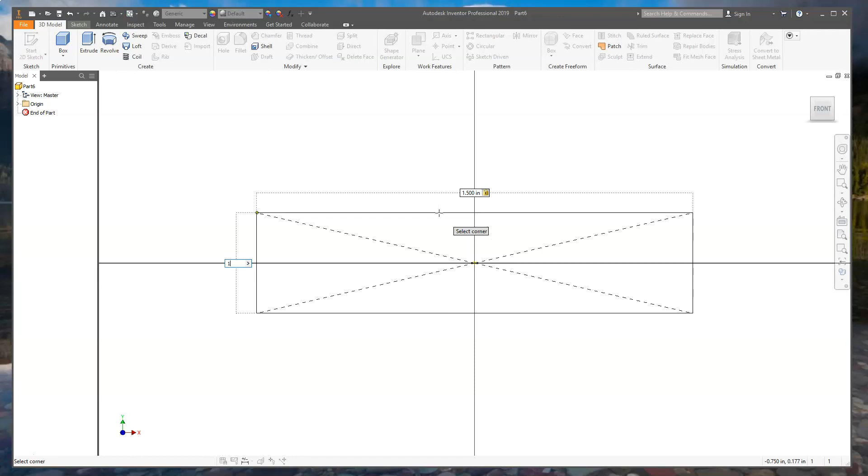So the first thing that I want to do is just get my basic cube out here, my block. It's 1.5 inches by 1.5 inches by 4 inches. So into Inventor, click on New, double click on Part, go to a box, XY axis, 1.5, tab, 1.5, enter, 4 inches long, enter, and there's my basic box, right?

All right. Now, I'm going to put a hole on the side of this, but if you looked at that drawing closely, you'd see that that hole was actually offset a little bit. You can see it's sitting back off that surface a little bit. The holes, the porting, they're on this face over here. So it's setting back 7/8 of an inch, and the diameter of the hole going all the way through is 1/2 inch.

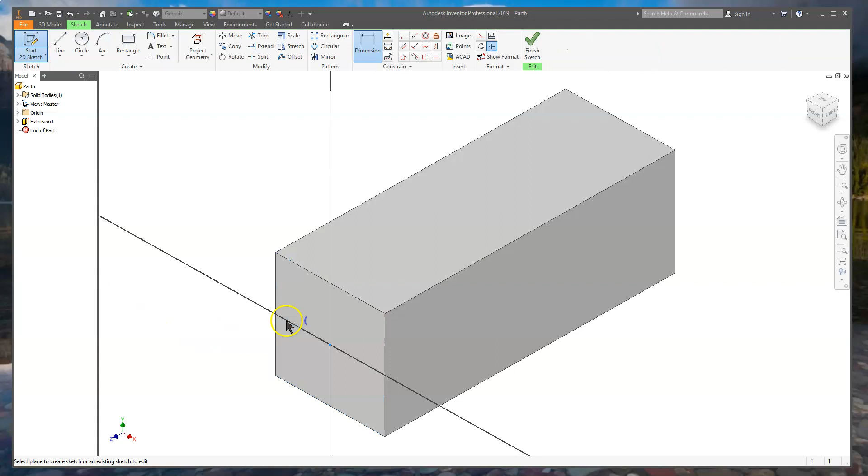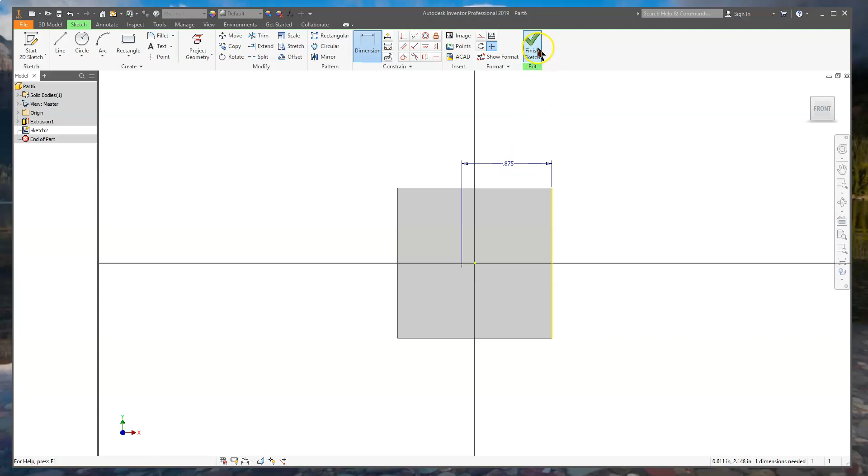So we go back over to our drawing. I tell it to sketch on this surface. I put a center point on there, right? I come off the center line here and I come back. I tell it that I want the distance from the face where I'm putting the ports to this right here was 875 thousandths, which is 7/8 of an inch. Tell it that I'm okay with that. I go up to my hole command. I tell it that I want the hole to be 1/2 inch in diameter, and I want it to go through all of it.

So you can see there, I'm going to change my view style here, view style right here. I'm going to show the hidden edges. It may not show up in the video very well, but you can faintly see it going through there. Now I'm going to do all my iFeatures all at the same time. I'm going to put all my holes in this first. I could do the iFeatures right now if I wanted, but it'll save me a little bit of jumping around.

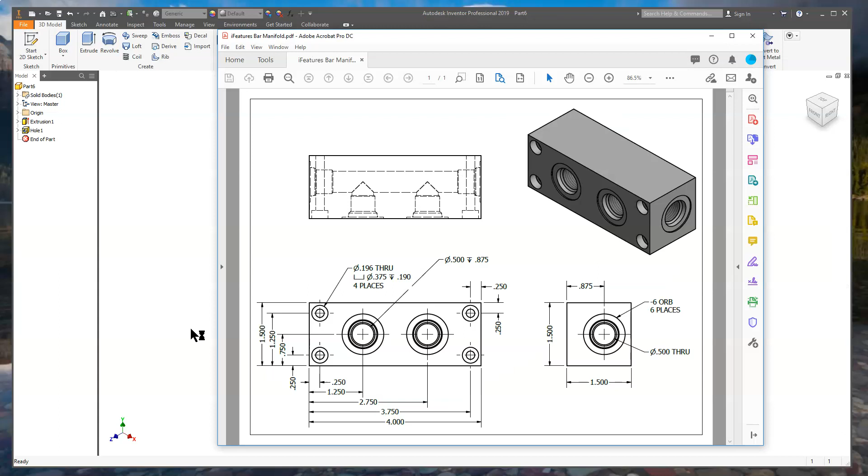The next thing that I want to do is put these holes in here, and these holes are again a 1/2 inch diameter hole, and they are 7/8 of an inch deep, 875 thousandths, and this one's located 1 1/4 inches over, and this one's located 2 3/4 inches over. So let me see what I can do there.

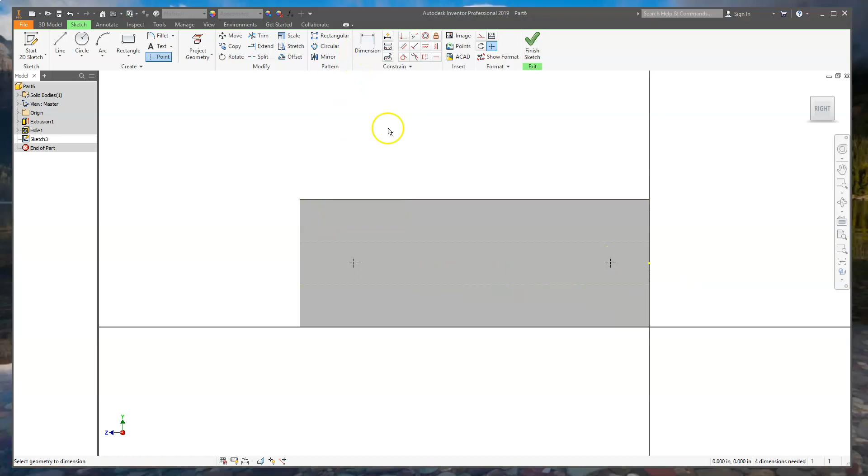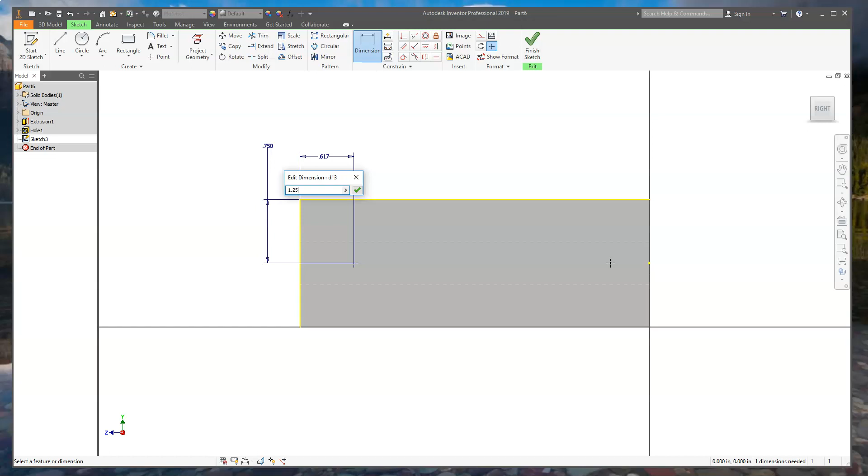Okay, I tell it that I want to do a sketch on this face. Tell it to zoom everything here, and I put a point here, and I put a point here, and I can check to see if they are centered up, right? So I can say from here to here should be a dimension of 1.5 divided by 2, and sure enough it was on there. And then I can also make sure that I am on the same level there. Put a dimension on to say come over from here 1 1/4 inch. And this one here was set to 2 3/4 inches.

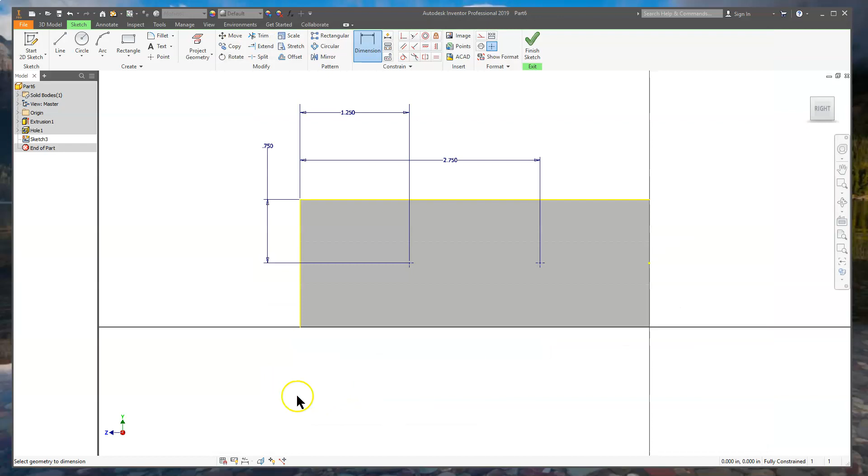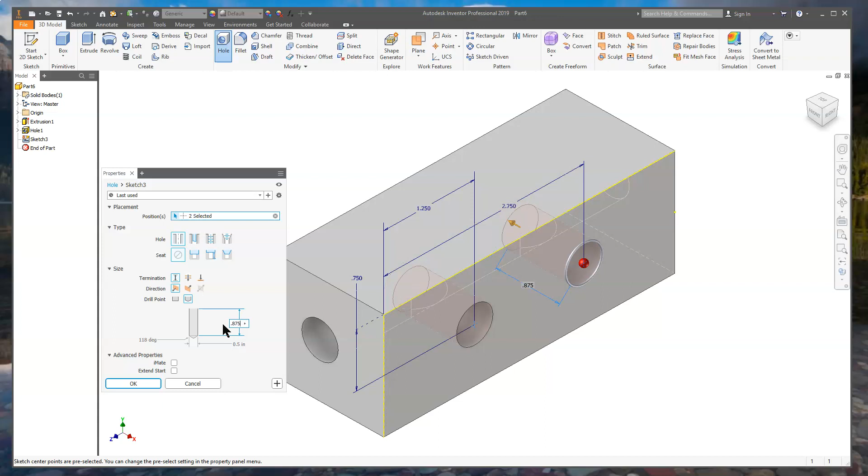So I've got my 2 holes in there, right? Let's make sure I've got those dimensions correct. One of them was at 2 3/4, the other one was at 1 1/4. So we're good. Go to the hole command, and these are set already for 1/2 inch, but we don't want to go through, right? We want a distance. That distance was not 1 inch, it was 0.875. So I click on that and say OK.

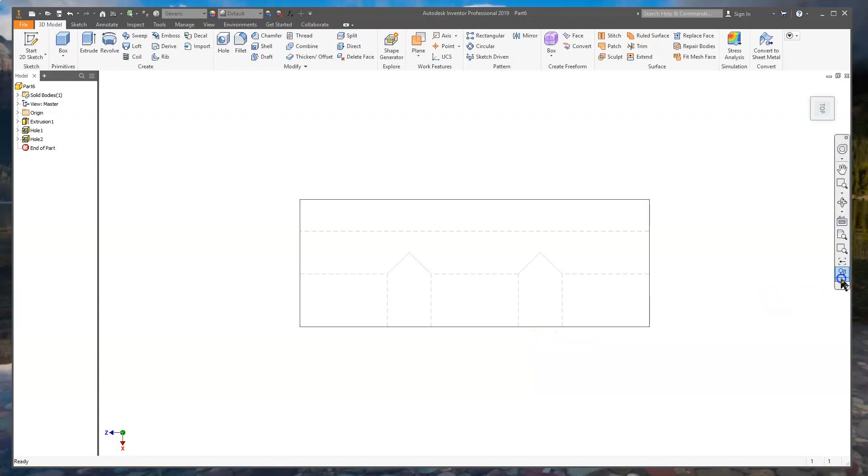If I look at the top of this, I'll change it to a wireframe view with hidden edges. You can see there it is coming together, right? Passageway, the porting on there. Go back to my home view. I need to put those ORB ports on there. These are going to be done with iFeatures. Let me show you that.

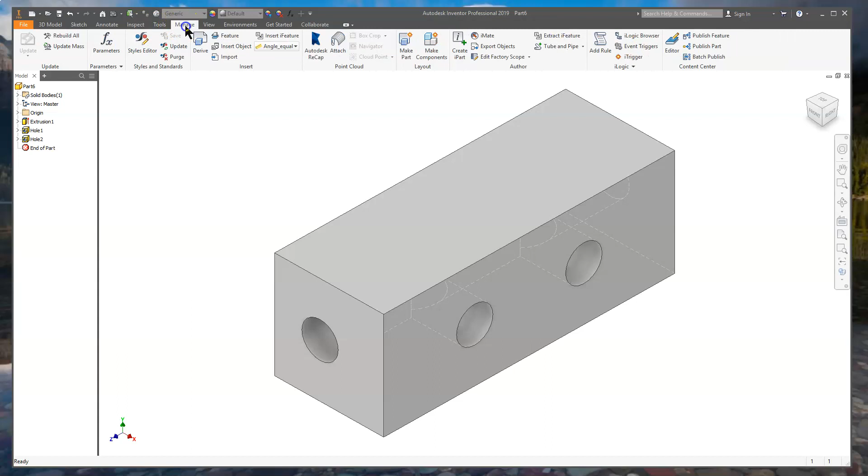Right now I'm in the 3D modeling tab. I'm going to move over to the Manage tab. And in the Manage tab, I have an icon here that says Insert an iFeature. I am in my ORB porting iFeatures, and it shows all the different ORB ports. These were made by somebody else for the Fluid Power program. They were actually using them in industry and shared them with us. So I'm going to make this a -6. I'm going to click on a standard -6 port, and click Open.

Now, it's giving me some errors. This goes back to our very first video where we talked about building projects. Everything that you've been doing has been automatically saving to that project. This is saying this is not in the location where your project is. It's not a problem. It's going to embed it in the part. So I'm just going to say yes. This is more of saying, are you really sure you want to do this? And I'm going to say yes, I'm sure.

So I come over here and it gives me this port that I can go in there and put on. I'm going to put it on this end here first. So I just click it on the surface that I want it to be on. And then I go up here to my dialog box. I'm going to click Next. I don't want to make any adjustments on the information here.

I go Next. And then I tell it I want to activate this in a sketch immediately. And if you don't do this, you're going to regret it. You want to go into the sketch first. I click on Finish, and it shows me some geometry here. These two should be lined up with each other.

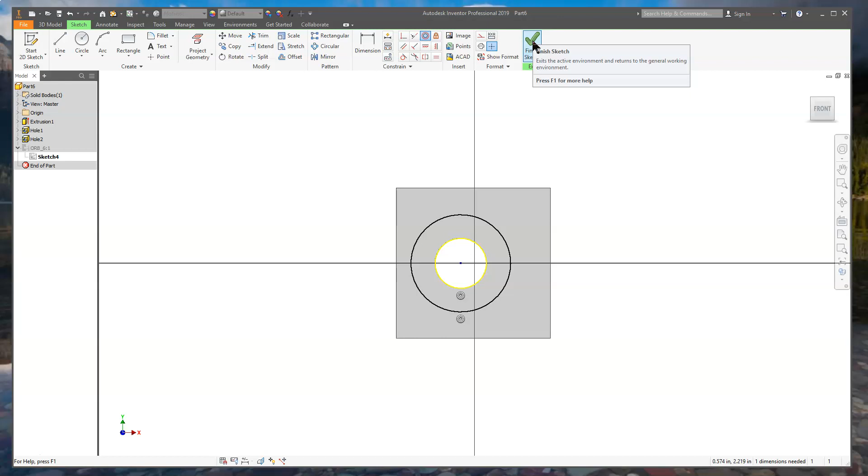I'm going to use the concentric constraint and say, take this and constrain together. And it automatically puts them together. The nice thing is if I move that original hole, it will move the ORB port with it. If I don't constrain it, they won't move together.

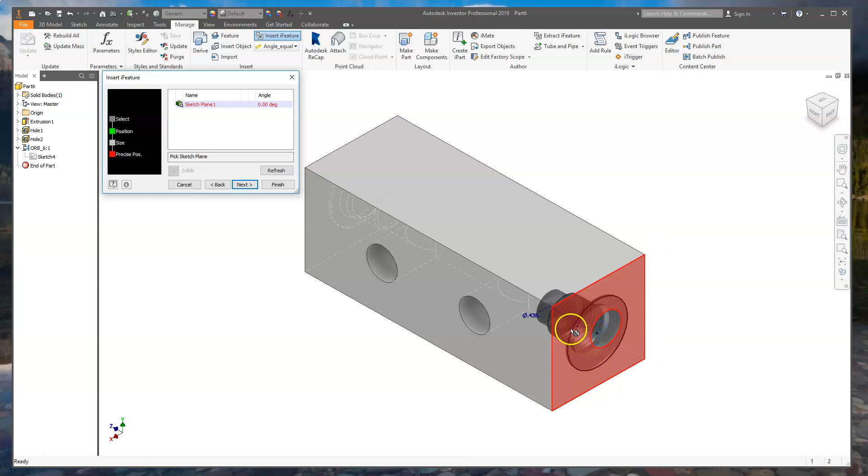All right, let's go get the one on the other end here. So where did I go? iFeatures. It's automatically going to the last iFeature I used. I go, sure, that's what I want. I know it's not in the correct directory that I'm using. It'll still work. I click on that face. I click Next, Next, activate into a sketch immediately, Finish, go up to make it concentric, tell it Finish. There we go.

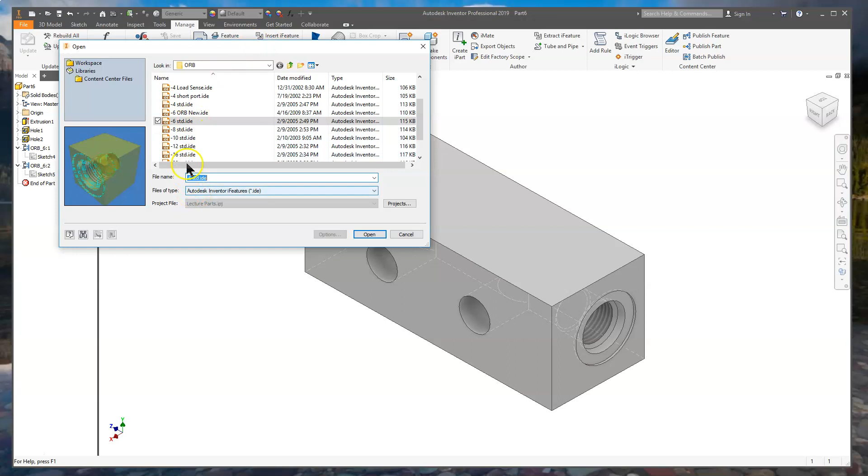I now have two more to go, right? I click on Next, and I click on that. You get it? I know that. Okay. I put it on this face. Now, this is really important.

If I had a third port and it was right in the center here, I don't want to fill that center position first. I want to fill the outside edges first, because once I put that in there, it's going to get confused, and you put the port on there and it's going to say, there's nothing there to do. The material's already gone.

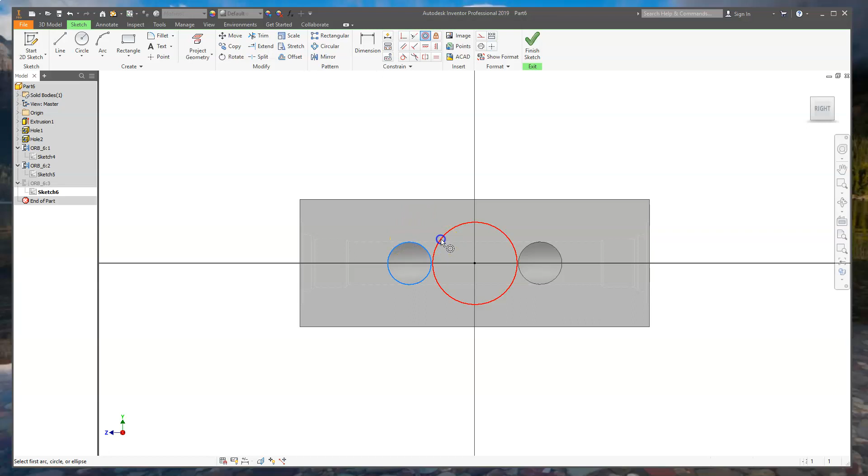So I'm going to go and say Next, Next, activate in the sketch mode, Finish. Go to constrain it here and say go here to here. Put it on there, go Finish. There we go. And then I go iFeature, and that's the one I want to use. I got it. I know it's annoying.

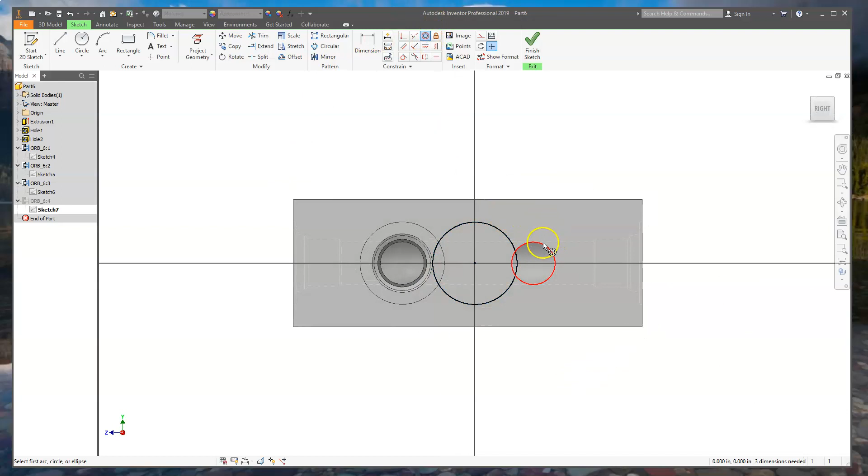We put it on here. We go Next, Next, activate in the sketch, Finish, and then we constrain it so they're concentric. There we go. Finished. Almost done, right? We've got to put those fasteners or the places through there to mount this. We should never build manifolds without having a way to mount it to a surface.

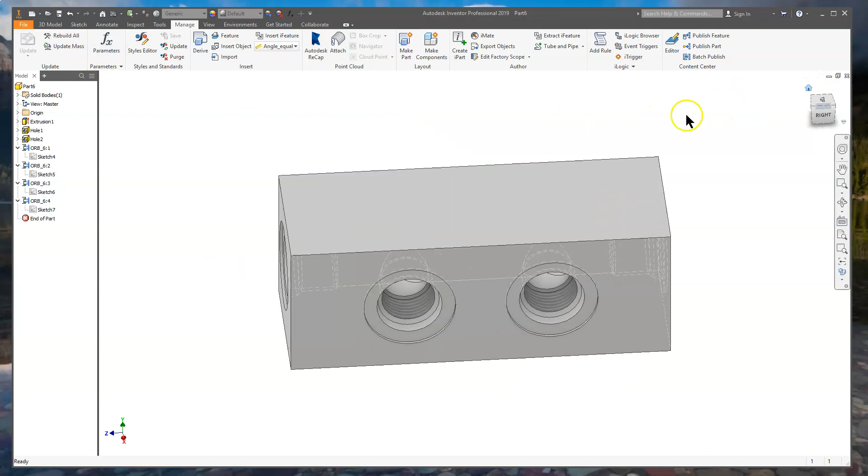So I'm going to go back over to the drawing and see what's going on there. Those are all located 1/4 of an inch off each corner. Okay, that should be pretty easy. So I come back in here. I'm going to get my part back in the home position. Go back over to my 3D model tools. Tell it to do a 2-dimensional sketch. Click on that surface. Tell it, come on, line up in here a little bit better.

And I'm going to go 1, 2, 3, 4. Use my constraint tool and say this and this should be on the same, as well as this, and this should be on the same horizontal. Then I go to vertical and say this one, and this one should be lined up, and this one

should be lined up. Put my dimensions on, showing that I'm going to be, what was that, 1/4 of an inch down, right? 0.25, and 1/4 of an inch over from this surface, 0.25, and it's automatically starting to position things here.

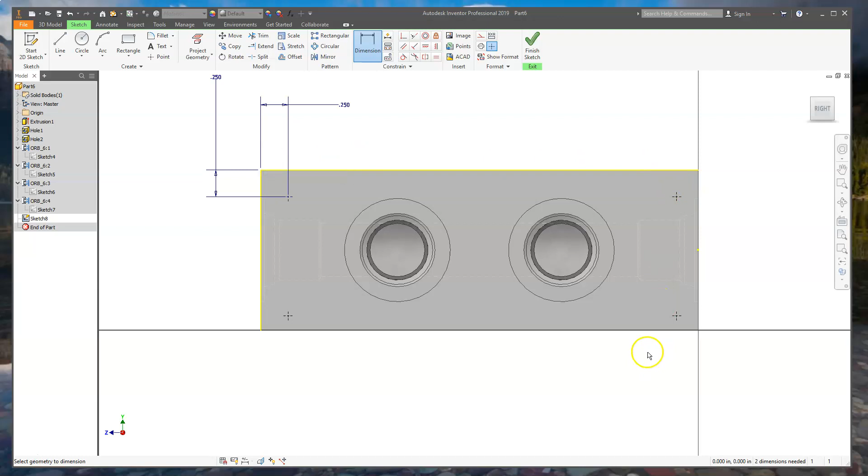If I go to my diagonal corner, it's going to line everything up by just putting in a couple dimensions here, 0.25, 1/4 of an inch, and then go from here to here, and go 1/4 of an inch. All 4 of those are now lined up by just dimensioning 2 of the 4. I click Finish. I go to my hole command.

On my hole command, I want a through hole. I want it with a counter bore, and I'm thinking that this is all a little bit large here. I know that this one for that fastener, let's see what the callouts say in the drawing. It says from the drawing that these are 196 thousandths through. So the through hole's 0.196.

Let me go over there and get that. So my through hole here, this diameter should be 0.196. That is a standard drill size. I could look it up, and then I say that the diameter of the counter bore is 3/8 of an inch. So I go in here, that is 3/8 of an inch. And then it says that the depth on it is 190 thousandths.

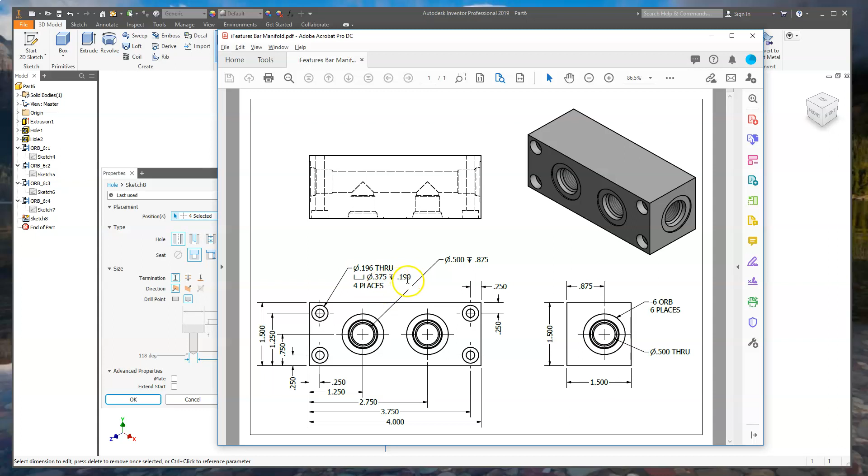This is where having 2 monitors, you guys, makes it real nice. But on doing these recordings, I do have 2 monitors, but it doesn't help you guys see what's going on.

So there we go, 190 thousandths deep. I click OK. And this part, did I tell it to go all the way through? I didn't, did I? Watch this. I'm going to double click on that feature and tell it through all. There we go. Now it's through all.

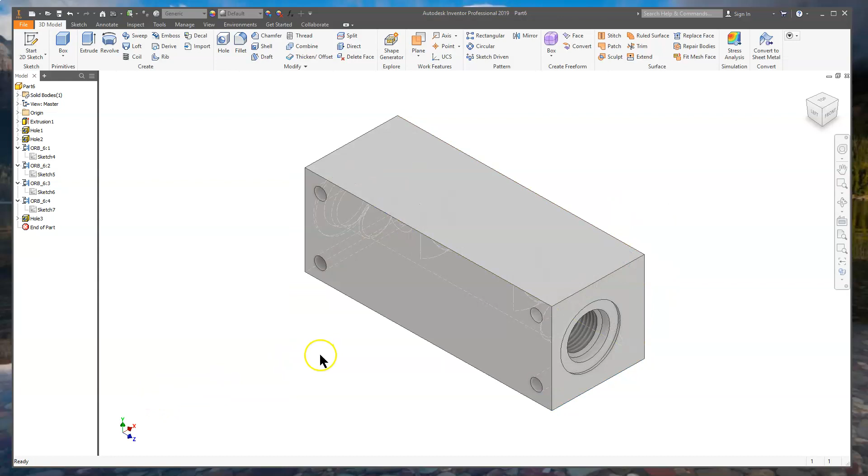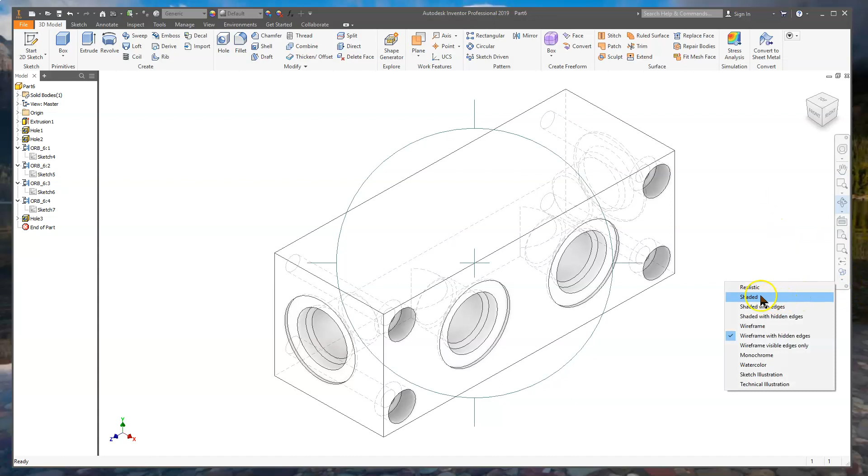I click on the house, reposition that, tell it to go into the wireframe. I can see there's my manifold. Okay. This is a pretty simple manifold compared to what we're going to be working with in our manifold design class. So let me go back up here to shaded. There we go. Okay. All right, we're done with that one.